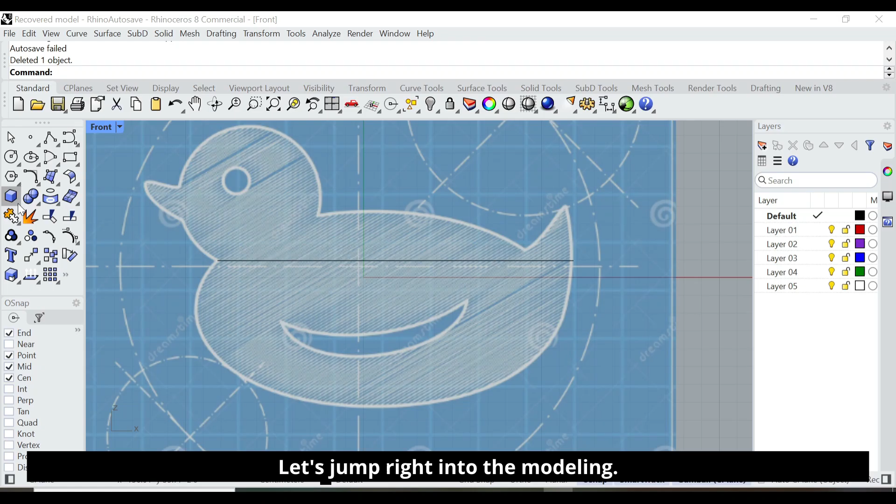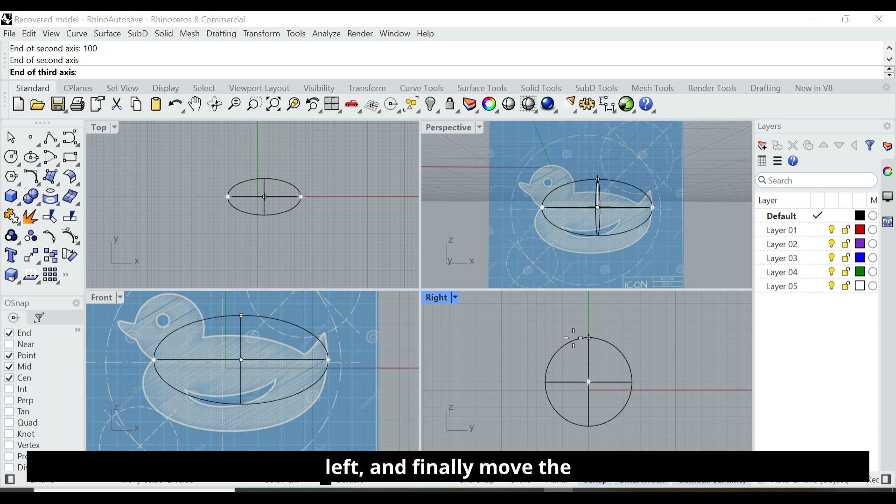Next, we use the rebuild surface command to adjust the number of control points on the surface. After entering the values shown on the screen, we move the lowest control points downward to shape the bottom, shift the next group slightly to the left, and finally move the top group of points gently to the right to refine the overall form.

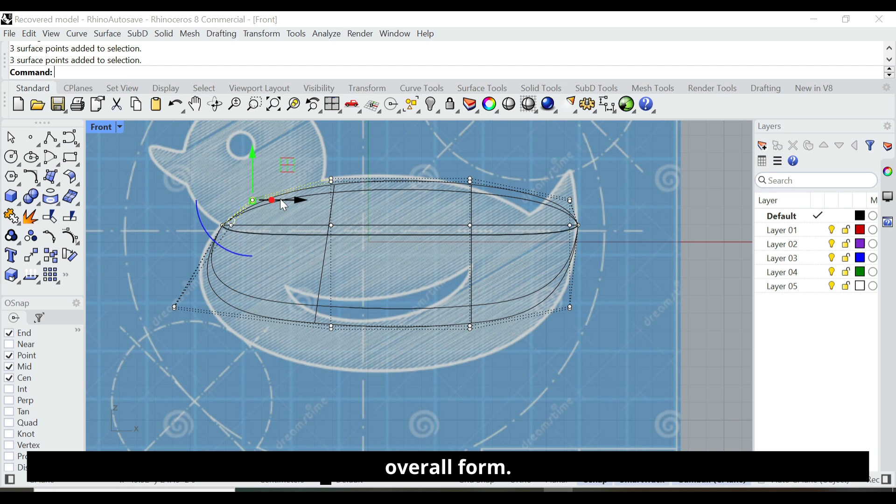Now I'm turning on the control points, and I want the front point group of the body to lie on the same plane. This part is very important. To do that, I'll draw a reference line and use Extrude curve to extend it in both directions. Then I'll align the grid plane to this surface using construction plane to surface.

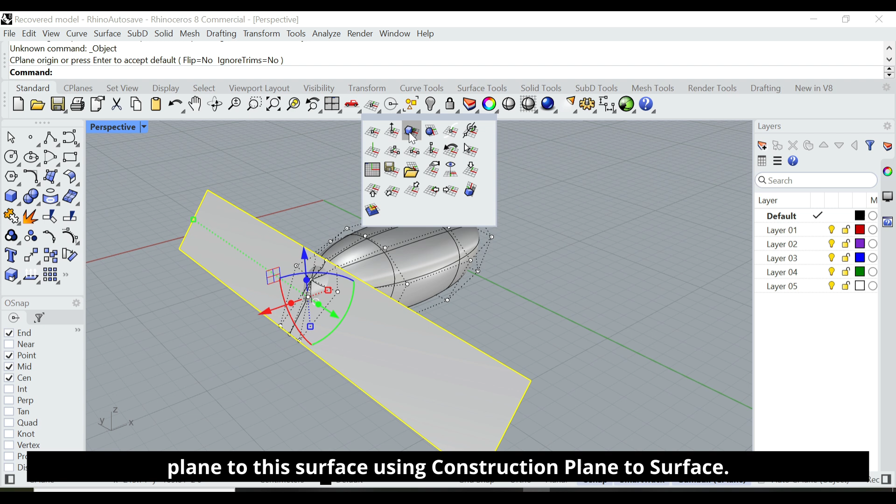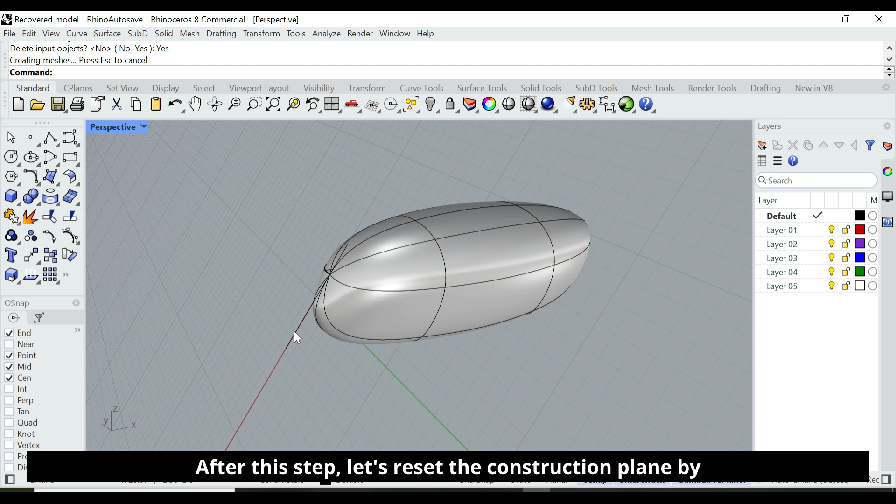Once the construction plane is set, I'll select the front control points and use Project to C-plane from the Transform menu. This aligns the points perfectly and defines the main body shape. After this step, let's reset the construction plane by choosing C-plane world top.

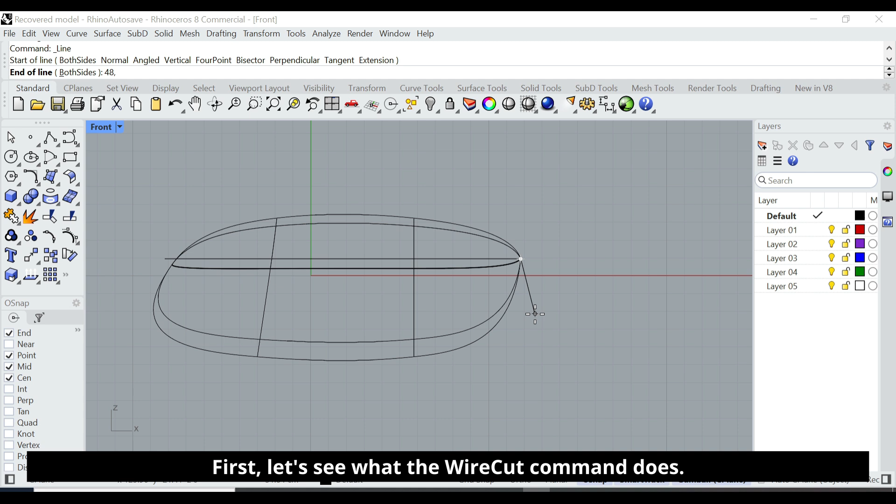Now we're ready to move on to the detailing phase of our plastic duck toy, where we'll use commands like blend edge, wire cut, trim, and fillet surface. First, let's see what the wire cut command does. It slices a 3D solid object using a 2D object without breaking its solid structure.

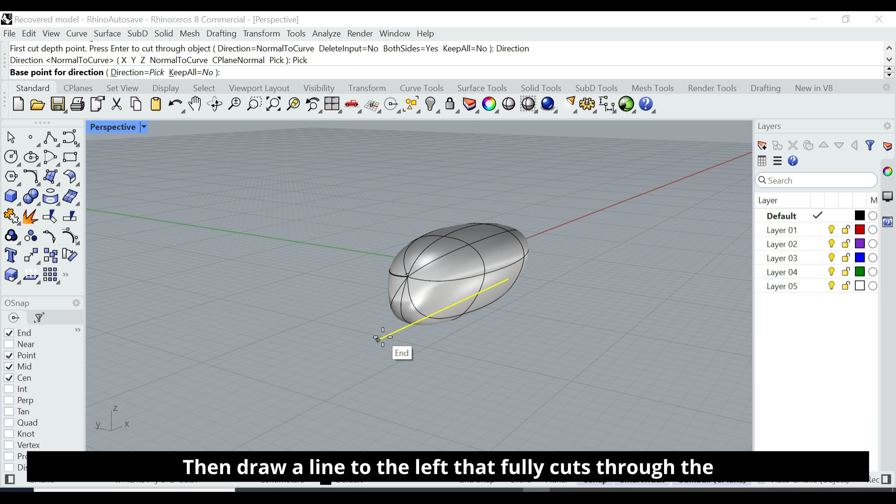For example, let's create a plane where the toy duck will sit. Draw a 48 millimeter downward line from the end of the body as a reference. Then draw a line to the left that fully cuts through the duck's body. We'll use wire cut with this line to slice the body. Let's do it. As you can see, we've cut the entire 3D geometry using the line.

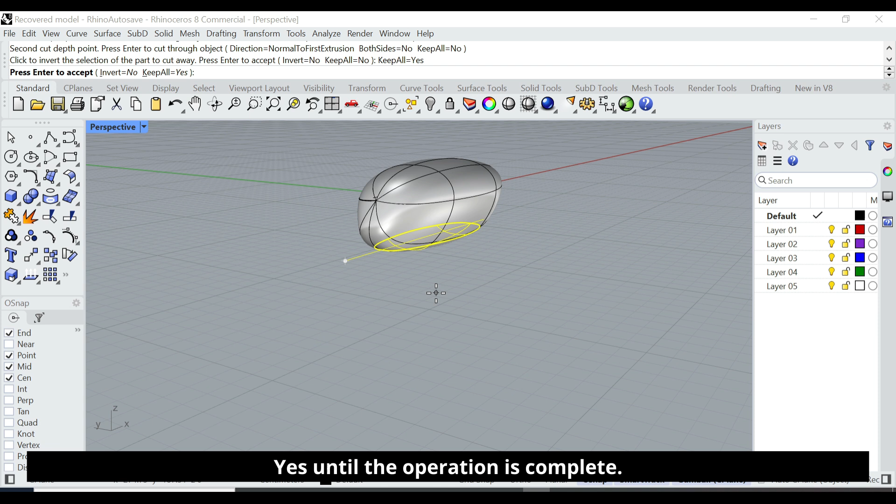Make sure to follow the command bar while using the command and ensure that Keep All in the command panel is set to yes until the operation is complete. In the end, you will have 2 separate solid objects. Now, select and delete the separated lower part.

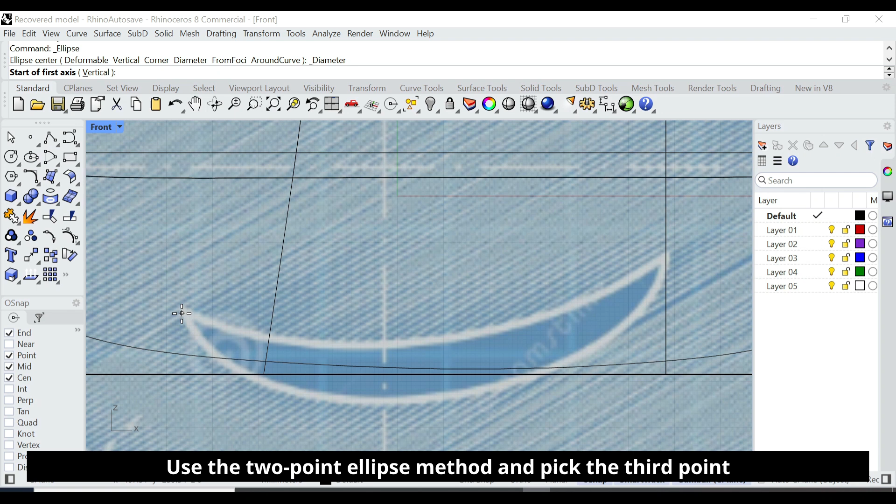Next, switch to the side view of the image and draw an ellipse for the wing detail. Use the 2-point ellipse method and pick the 3rd point from the image as a reference. Then use this curve with WireCut to hollow out the body.

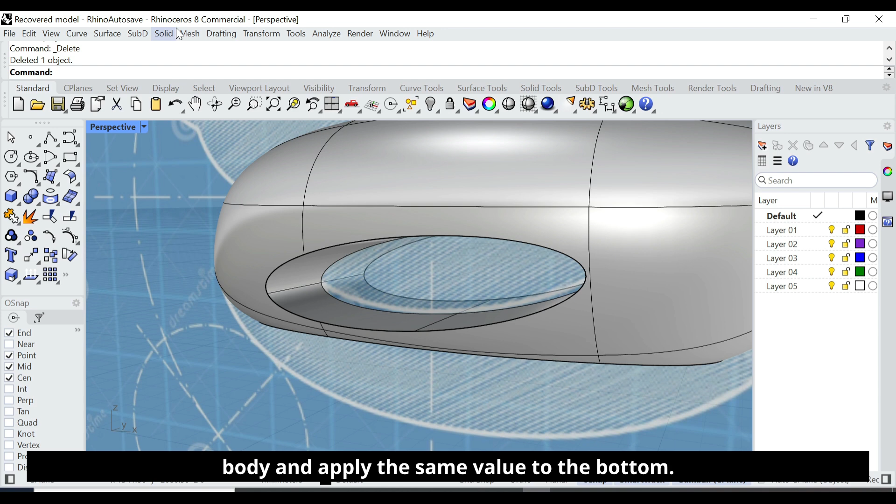Finally, we can apply the Fillet Edge command with a 25 millimeter radius to the sharp edges on the body and apply the same value to the bottom. Now we are ready to move on to the next step.